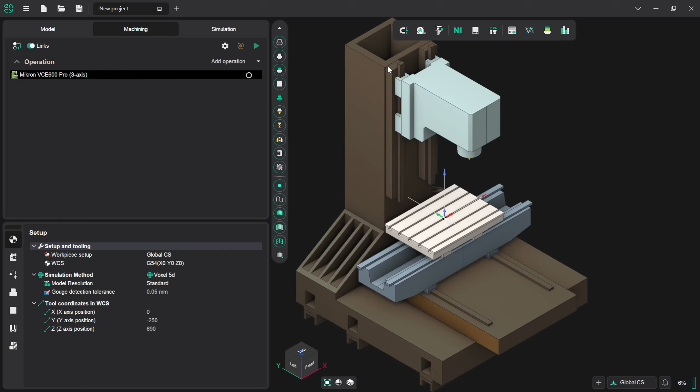So to start with, we're going to go into the Model tab, and we're going to make sure that we've got the part folder highlighted because that's where we want to import our part to. And I'm going to click on the import button, and on my desktop here there is part.igs, which is the file that we're importing. And as we can see, we've now imported the part.

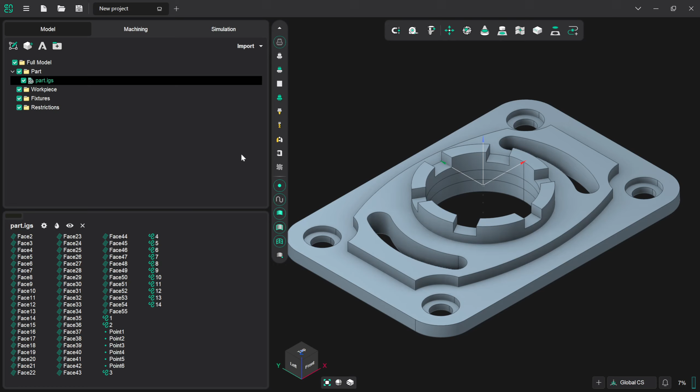There's a few interesting features on there, nothing too horrifically challenging, just enough to give us a bit to work with and a bit to understand. And it gives us enough flexibility to use a range of different operations just to get the best feel for the workflow in ENCY.

So now that we've imported this, we're going to go back to the machining tab because we now need to take a look at setting up some fixturing for it, and then setting up the workpiece definition, which is the material stock functionally, and making sure that we've got our G54 datum set in the correct position. So we'll start with the fixturing. So to do so, we're going to go to the inspector tabs here, and we're going to click on fixtures.

Now we've got a few options here. We can add chuck, vise, clamp, all that sort of stuff, but these require that we set everything manually. What we can also do is we can shortcut that, which is what we're going to do for this instance. We're going to click on the load button with the drop down here, and we're going to grab the examples vise 66 by 82 MCP file. This is a 66 by 82 machine vise. It's quite a nice size for what we need.

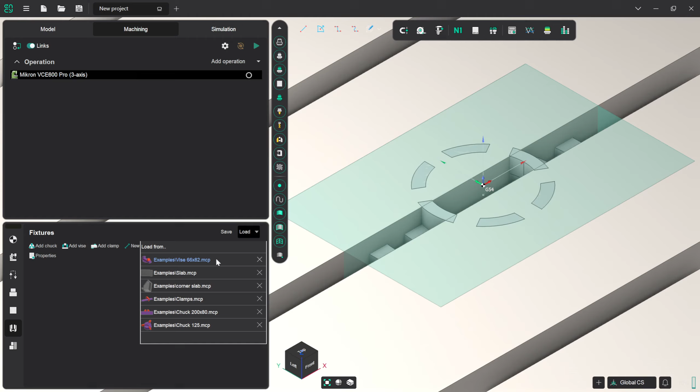And if we click on it now, we can see how it automatically defaults to coming in at the center of the work table. It's aligned quite neatly with the T-slots as well, so we don't need to do anything to shift it. So yeah, I'm quite happy with that there right now. That fits for our needs.

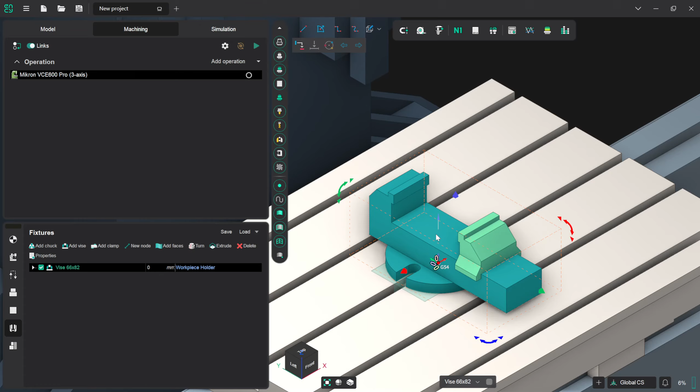So the next thing that we're going to do now is we are going to take a look at the workpiece surrounding our part. So we are now going to move over to the workpiece inspector, and I'm going to click on primitive here. So as I say, we've still got all these options here, but for now we're just going to draw a cuboid around our part. There's already one by default, but we want to make it a couple of millimeters thicker because we're going to be facing it off. So I'm going to click on primitive now, and we've got box as a standard definition.

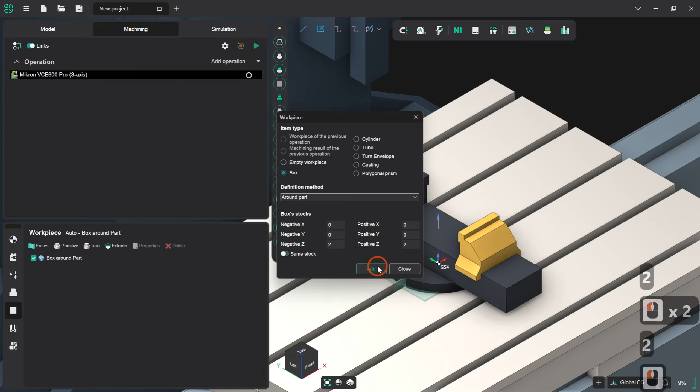Ordinarily, same stock is turned on. This means that any value that you put in is going to be repeated in every single direction. We're going to turn that off, and we're going to add 2 in negative Z and 2 in positive Z, and then click add. So we'll now close that, and we can see by the shadow here there is a slight increase in the thickness of this, but we are now going to be bringing this up to where we need it to be, and we're going to be setting the workpiece coordinates and the system and everything like that as well.

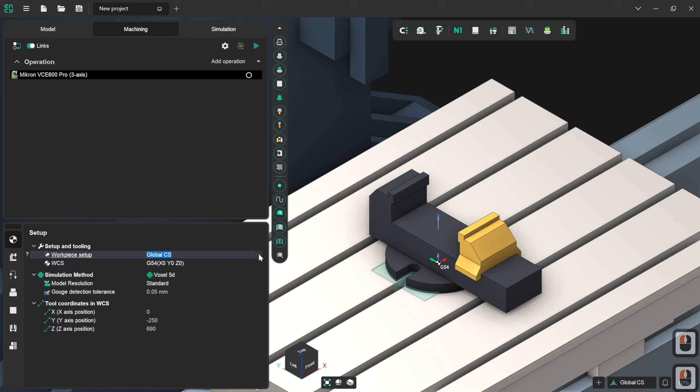So to do so, we're going to click on setup, and we're going to click on workpiece setup, and then we're going to click on the 3 dots here. Okay, now doing so allows us to define all of these things either with vector or coordinate data, or we can also grab the various arrows that are highlighted here as well, which is what I'm going to do for this.

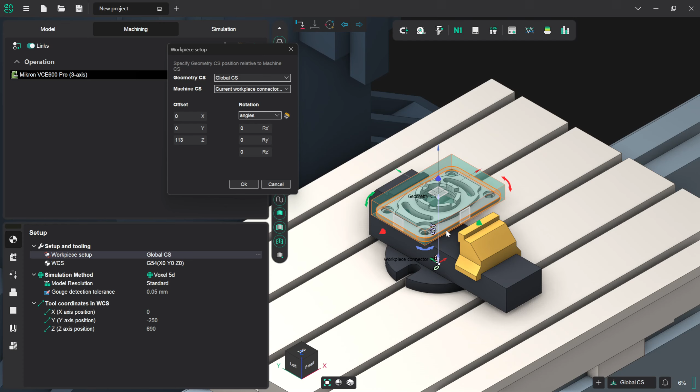So I'm going to grab this blue arrow here, and we're going to drag it vertically in Z. Now, ideally, what I'd like to do is I'd like for the vise jaws to be gripping this highlighted face around the edge of the workpiece. So we're going to need to change our view because we don't know the exact numerical value of that right now. So I'm going to use the navigation cube down here, and I'm going to click on front so we can see stuff a bit more clearly.

Then I'm going to zoom in, and I am going to drag this vertically until the edge of this face is clearly above the edge of the vise. Now, 116.4 is a bit of an awkward number to remember, so I'm going to bring that down to 116.

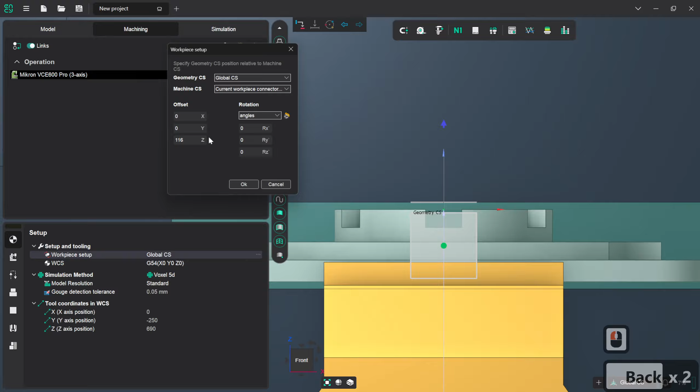As we can see, there's not a huge amount of space here, but to reference the very old machinist adage, clearance is clearance, and that will give us just enough space to make sure that we don't hit the top of the vise when we're facing that off. So I'm going to click on OK now. I'm quite happy with where that is.

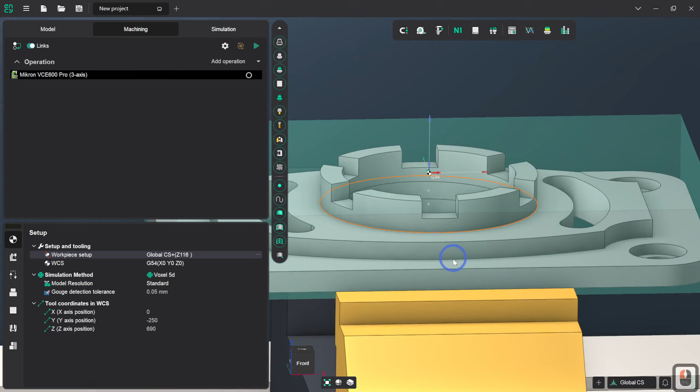The next thing that I'm going to do is I'm going to click on workpiece coordinate system here, and I am going to grab that G54 sensor. Sorry, no, I'm going to click on this first. So we've got the little ellipsis here, which actually brings up what this is in terms of its numerical values. I'm going to grab that little marker and I'm going to drag this over to the bottom left corner, but we can see we've got a bit of a problem because it's not snapping. I'd quite like it to snap.

So in order to get the best results, I'm going to cancel out of this and I'm going to turn on Smart Snap. Okay, so now I'm going to go back into this and I'm going to grab the datum point again, and you can see how it's automatically sort of dragging its way towards various points along its path, but we want it to be in that bottom left corner there.

Okay, so we can see now that the offset is -75, -50 and +2, which pretty much lines up with a 150 by 100 millimeter workpiece, where the thickness has been brought up by 2 above 0, so that suits what we're expecting. So we're now going to click on OK. That's pretty much good to go.

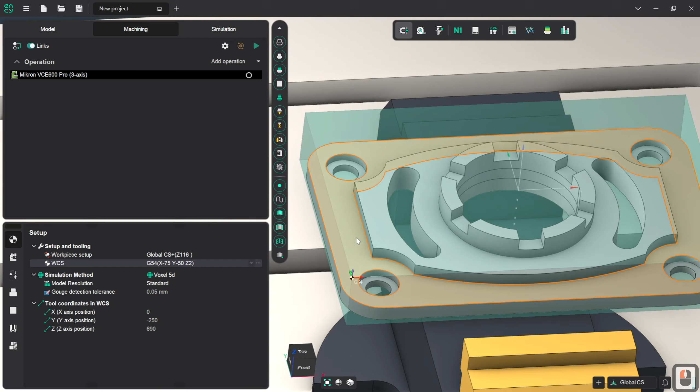The only other thing that really remains to do at the moment is, it's a little bit fussy, but there is reason to it. I'm going to grab this vise jaw and I'm just going to bring it up so it snaps against the side of the workpiece. Now, ordinarily that might seem like window dressing, but the reason for it is ENCY calculates the kinematics of the entire machine whenever it's running a simulation or whenever it's running a toolpath. And by placing the vise jaw in the correct place, it allows ENCY to be able to accurately determine motions around that vise jaw so as to not impact it.

Obviously, were that not in the correct place and ENCY decided that it was going to put a transitional path through where the jaw actually is, this would be an expensive problem. So it's always best to get everything to correspond to reality just as much as possible. This is standard good practice in any CAM programming environment, and it's not something specific to ENCY.

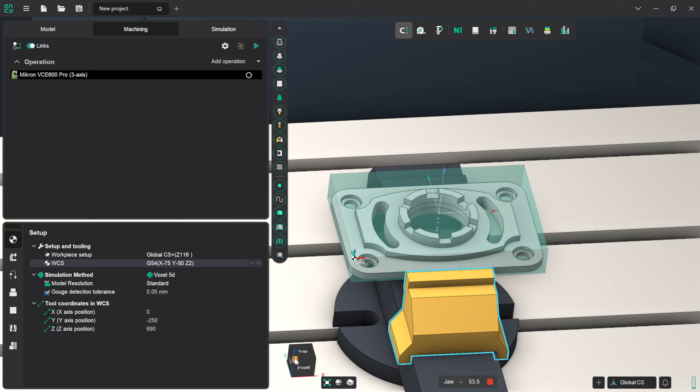However, going back to the original point, we now have our workpiece mounted up on the table and currently secured and ready to go with our G54 datum point happily defined. So in the next video, we're going to take a look at some initial machining processes, and we're also going to look at importing tool tables as well.